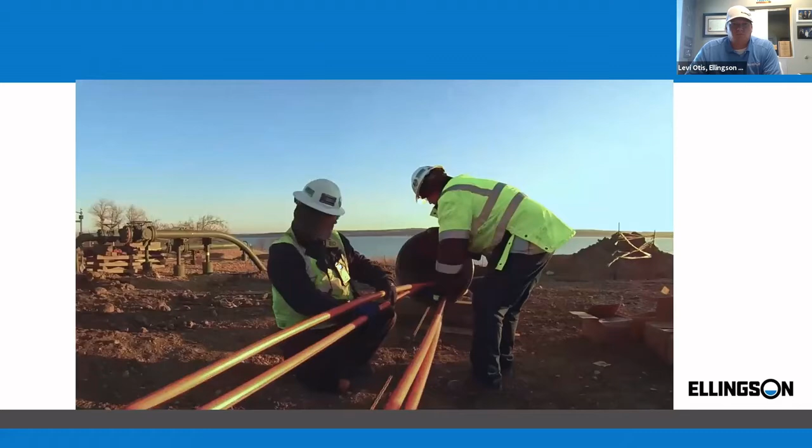Which is why we're evolving to address new challenges and make the most of new opportunities, to unify our organization as one team with one set of company goals, one vision of success, one story that simplifies our communications, with one set of expectations for one brand with more power to help our customers succeed.

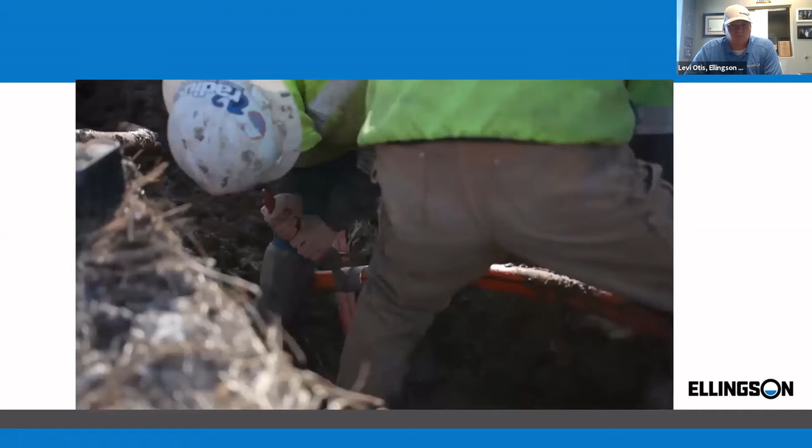How we show up, in the way we work and do business. Number one: the customers we serve, one who wants value and expertise, and the 5 values that make us one.

People driven to help everyone succeed. People who listen, understand, and then build solutions that exceed customer requirements. People who want to be the best, who measure performance and strive for constant improvement. People who innovate and constantly search for a better way in everything they do, who embrace the challenges that come with change. People who stay curious and hold themselves accountable and know how to celebrate our mutual success.

It's an evolution driven by what we'd like to be, and by what we'd like to do, and do it across industries and projects, all operating together as one.

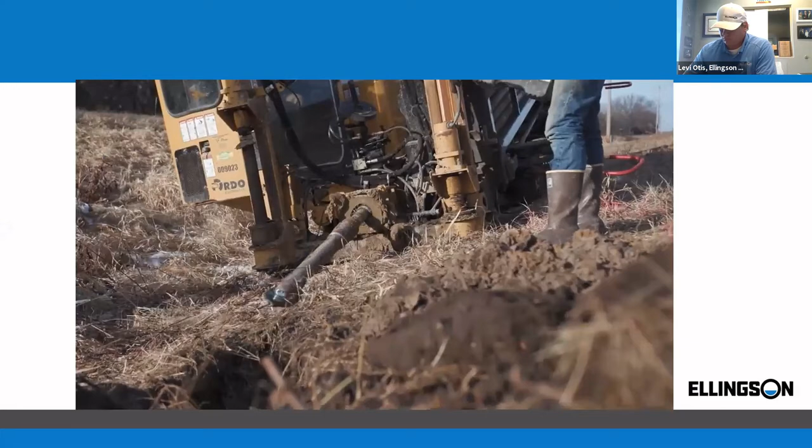From agriculture and infrastructure management to engineering and underground utilities, all business is more aligned and prepared for growth than ever before. We're ready with full service, turnkey, global solutions built on decades of practical experience and innovation, always putting customer needs first, with efficiency and productivity improvements to ensure success now and long term.

As one, Ellingson is better aligned to serve our customers. With unmatched customer service, we can solve the problems of today and address the challenges of tomorrow. We bring diverse skills and experiences organized around one business, one set of values, one shared commitment to success. One Ellingson. And when we are one, we all succeed.

All right, appreciate that. Sitting through that, our company takes a lot of pride in what we do, and all of the people that work with us, we consider each other coworkers, and the Ellingson family definitely treats us all like that.

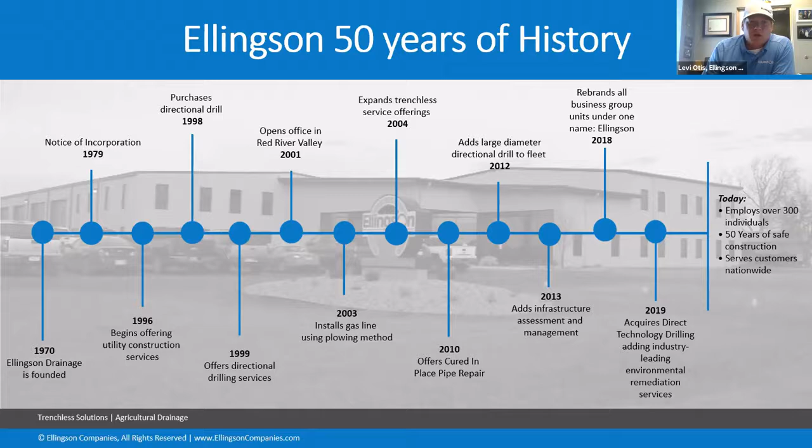Really, our guys get to see the world. As you saw in the video, we do oil and gas, water and wastewater, power and telecom, agriculture, and commercial industrial work.

These pictures are more of the surface examples that we do - pipe fusing, cured in place pipe which we talked about, and ramming. If you guys have been around, you probably know what all this stuff is.

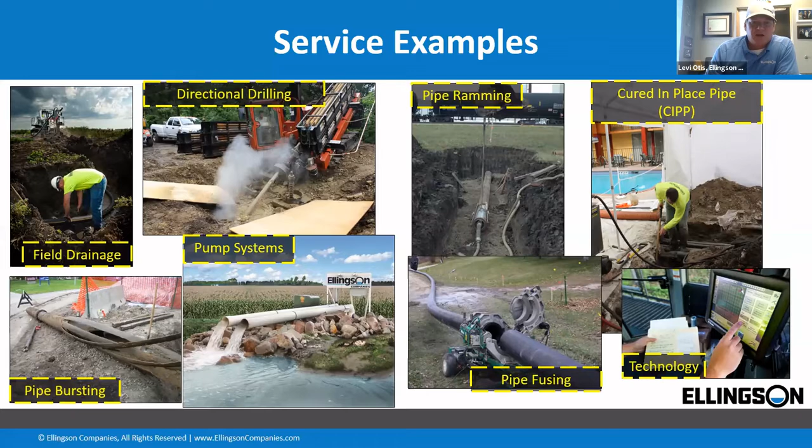Some of our customers - we work for some of the biggest companies in the world. Obviously Anheuser-Busch or Miller Coors, you know them, Crystal. We do a lot of oil and gas business.

Cavendish, Amazon - that's a DTD customer. We did drain tile and some different things for Wonderful, who you've probably seen their pistachios in every gas station from here to California. There's some more - we do a lot of federal work with our DTD company. It's pretty cool when you start looking at our customer list of who hires us.

Notable partners include the grower associations - as Lance said, we work very extensively on behalf of farmers in the Northern Plains on NRCS issues, U.S. Fish and Wildlife, and I'm sure most of you water board guys are farmers yourselves, so you deal with that. I have the benefit of working again for the Ellingson family on behalf of farmers, making it easier for you guys to do what you want on your farms and making sure the government isn't overstepping their bounds.

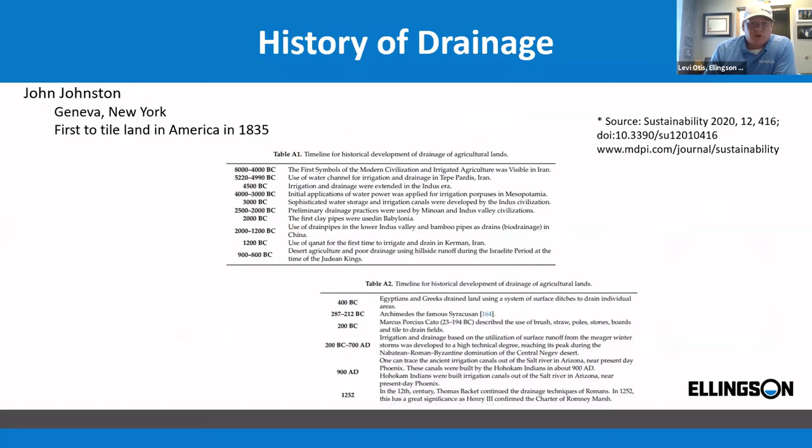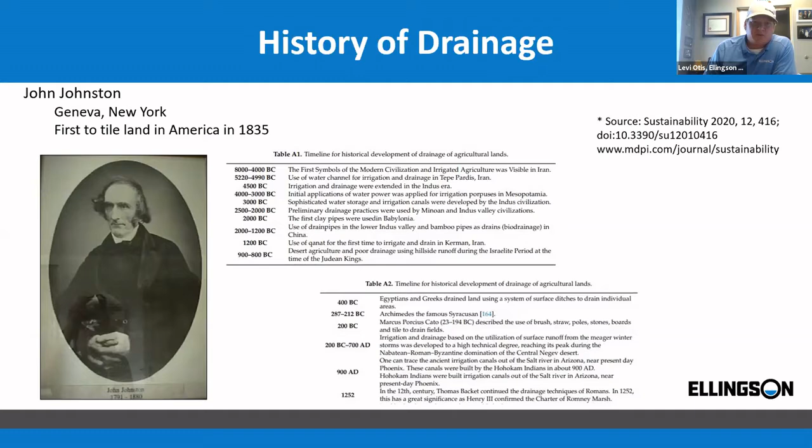So, history of drainage. I put John Johnston up there, from 1835 - he came to the United States and brought the first tile. The only reason I put him up there is my mom's maiden name is Johnston, so I like to feel it's in my lineage. I also thought it was funny that the first tile in irrigation ever discovered dates to around 8,000 to 4,000 BC in Iran, of all places. And of course the Romans, it's heavily documented that they tiled in 200 BC. It's just kind of fun to read that history if you're a history buff.

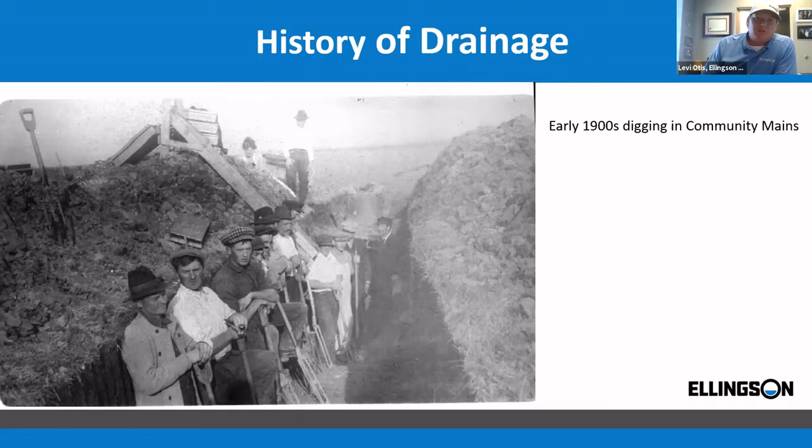When we talk to a lot of the old guys in the I-states, the neighbors all got together, and that's why I'm sharing these pictures. Here's Boone County, Iowa. These aren't hired men, these are the guys farming it, and they all united and said, wow, we have water issues, let's get together. As crazy as the world is, I think some of this stuff we could get back to, working with our neighbors instead of fighting all the time.

Hex pipe is not very common. Sometimes you'll see it dug up, but it's used primarily in Western New York and Northeast Ohio. I give Roger a hard time, Roger Ellingson, the owner of our company, that this is a picture of him digging back in the 60s. Of course it's not.

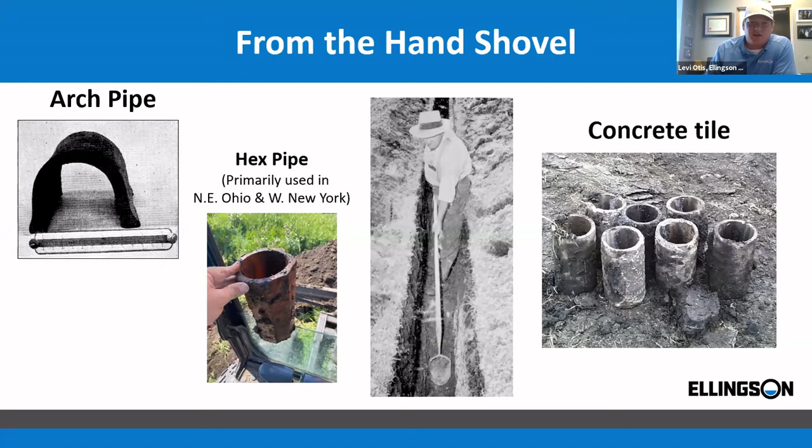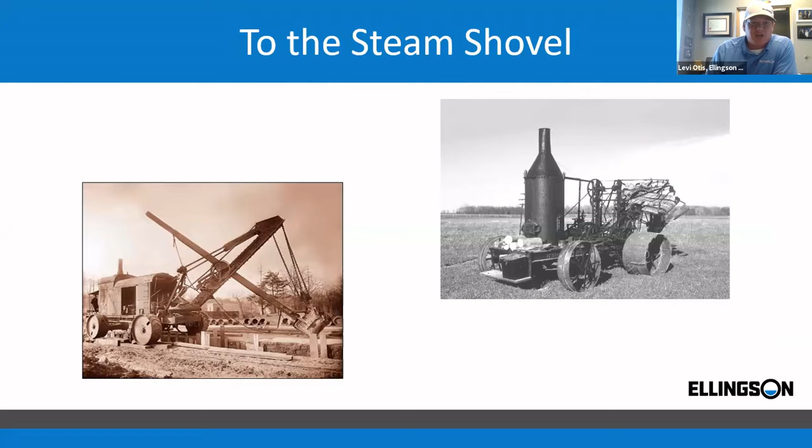And then concrete tile, which we actually do dig up here in North Dakota once in a while. Up by Tappen, North Dakota, we've found quite a bit of concrete tile. I don't know if farmers 75 years ago were bringing it in dark and not telling their neighbors about it or what, but steam shovels - if you ever go out to Rollag, I think they've got a couple, which is kind of neat, but the advent of the steam shovel started to speed things up.

1970, the first plastic tile kind of popped in, and I asked Roger one day what it was like to get to plastic tile after laying clay. He says, I was lifting clay tile into a trench, and a salesman came out, flopped out the plastic pipe, and kicked it in with his foot. From there they strung it in 250-foot coils, and he thought he died and went to heaven when he was a younger man, putting it in by hand.

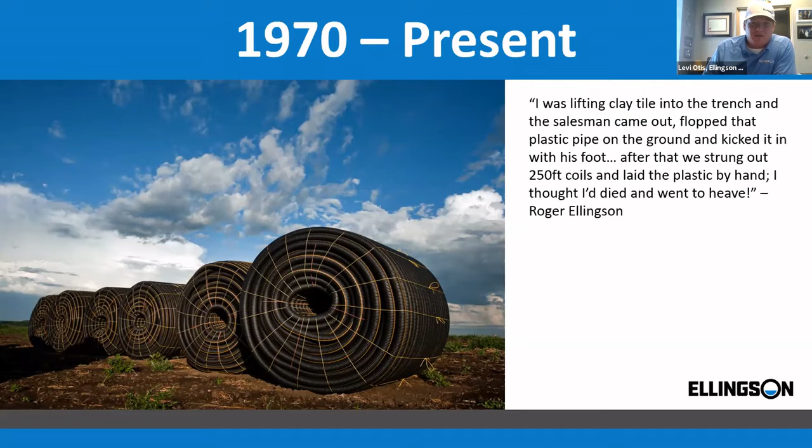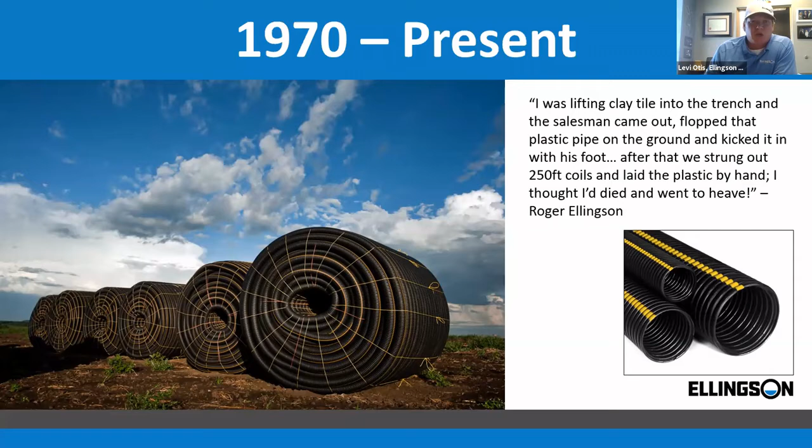That was pretty cool. So obviously, you know what Prinsco pipe is. We do 99% of our business with Prinsco. They're another family-owned company that's just a wonderful company to work with. So if you haven't, I'd encourage you to call them, for those of you who do tile on your own. It's a great company.

Speicher wheel machine back in the 70s, down in the bottom left corner, and then this Badger plow we owned in the 80s to the mid-90s, and was sold and went down to Windom, Minnesota, and now it's still in operation in Indiana today, so that's pretty cool. And then the Bron 550 tile plow, that's what everybody has seen up here. It's a very powerful machine, looks like an army tank, and they do a really nice job as well.

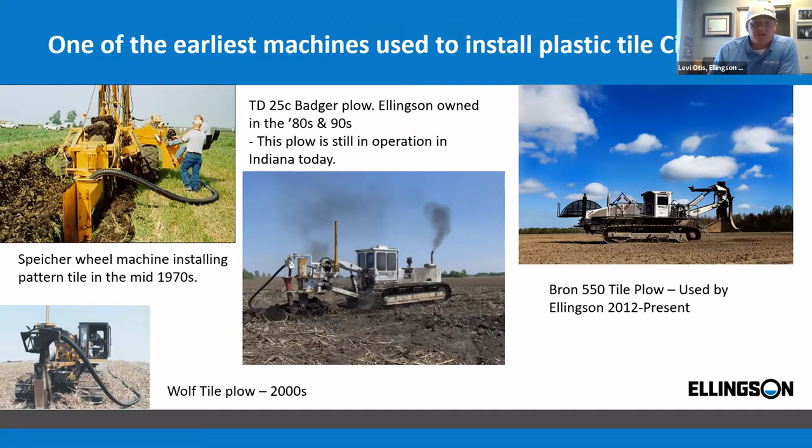Spot or random tiling. The I-states had the benefit of having what is now the NRCS, but SCS for many years, paying farmers to go and drain those low areas or wet ground. I'm not going to call them wetlands because I never did a determination on them in the 40s or 50s, but you get my point. So that's what a spot tiling plan looks like.

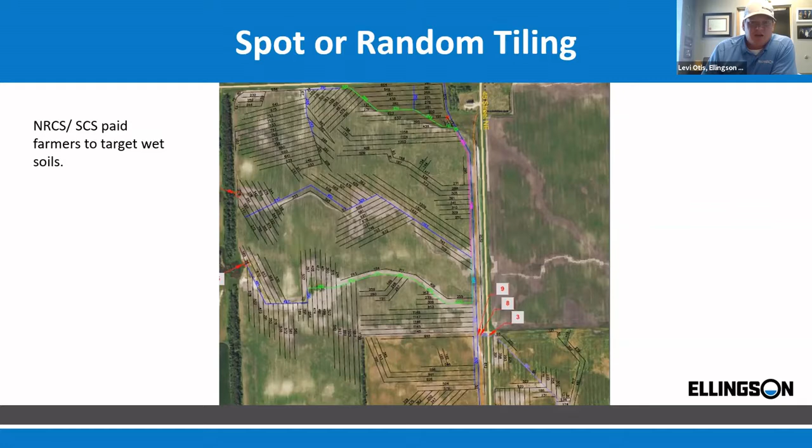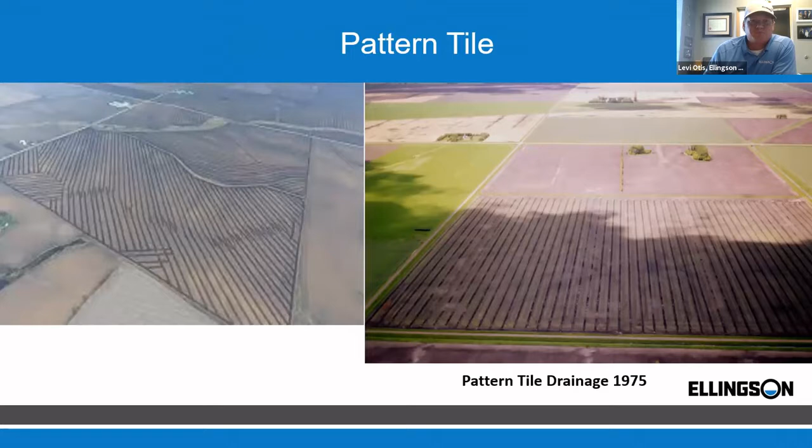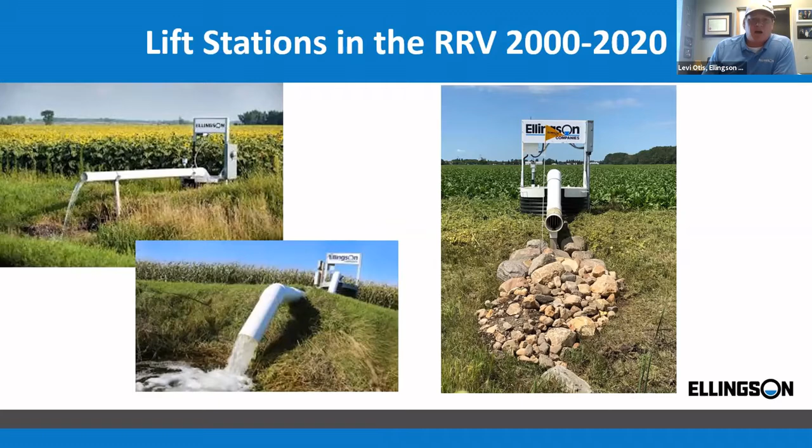Lift stations. First lift stations were probably built by Ellingson. I know there were a couple others, but really started mass production as tiling ramped up through 2000, and I think Lance mentioned 2011, 2012. That's really when things started kicking off, and I'm sure you see those all over the place.

So Drainage 101, I want to play this video for you. It's about 5-6 minutes long. If you've seen it, use the bathroom. But it's an incredibly good video, and I can't do as good a job explaining Tile 101 as this video does. Prinsco put this together, and they're coming out with another version soon, so that should be pretty cool.

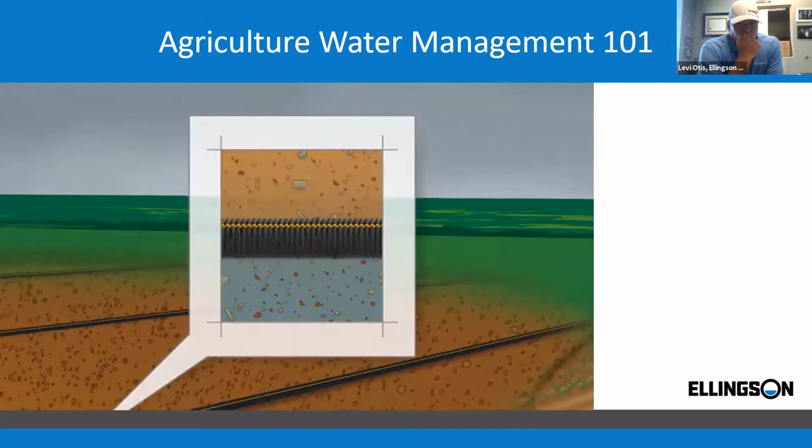From a side view, we see the main. Note, the water table is just below the main. A properly designed water management system does not take all of the water out of the soil. It manages the water table to keep it at a constant depth, which is usually 3 to 5 feet below the soil surface. By managing the water table, the optimal soil profile for plant growth is achieved.

The soil profile is the area from the soil surface to 2.5 to 4 feet below. This area is where nutrients are taken up by the plant roots. Ideal soil properties in the profile are 50% minerals and organic matter, 25% air, and 25% water.

A cross-section of the main reveals the laterals entering, allowing the water to flow downhill into the main. As rain begins above ground, the soil profile is able to accept water from the surface as it filters down. Once the water reaches the perforated laterals, excess water enters the system and begins flowing to the main.

Compare that with the same field without the water management system. Typically, the water table is higher, with less area available to absorb water. When the soil reaches full saturation and rain continues, excess water cannot soak into the ground.

The only place for excess water to go is to flow over land to the lowest point, carrying with it valuable soil and nutrients. This will cause erosion of surface soil, dumping sediment and nutrients into the ditch or stream. A water management system allows more water to be filtered through the soil and less risk of soil erosion.

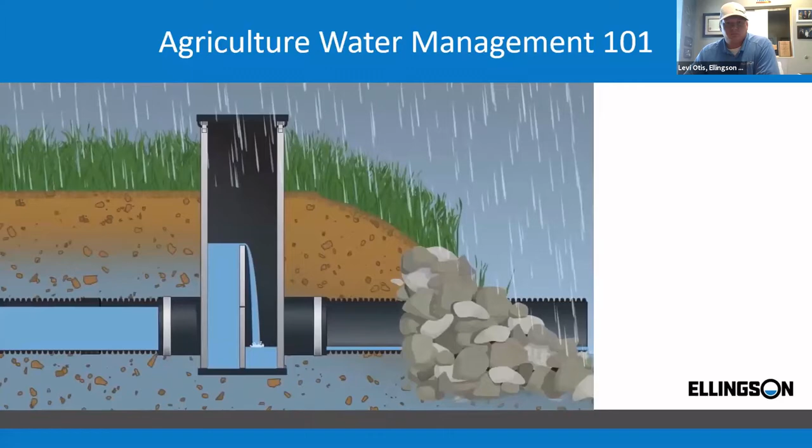When the system is saturated and the pipes are full, excess water flows over the stop logs and through the outlet. Stop logs can be adjusted to hold water in the system, particularly after planting in the spring and prior to extended dry periods throughout the growing season. If excess water conditions are present, stop logs can be removed, allowing water to flow out of the soil profile, especially prior to spring planting and fall harvest.

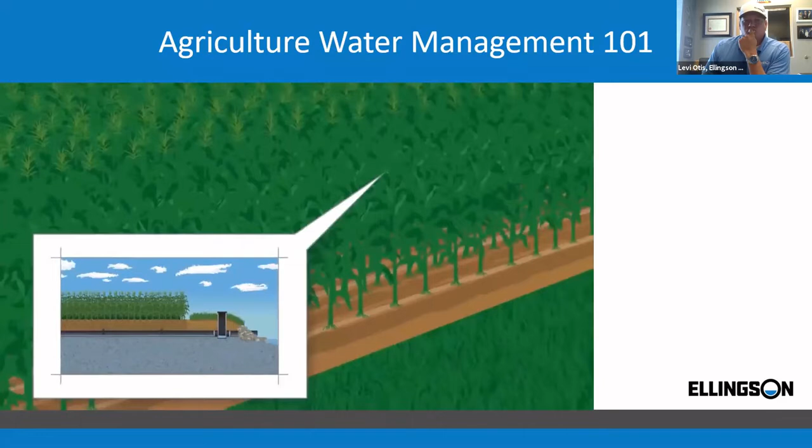Managing the soil profile with a water management system has tremendous benefits. It is an affordable tool producers can use to directly impact the health of their crops during the growing season. Keep in mind the golden rule of drainage: drain only that which is necessary to ensure trafficability and crop production, and not a drop more.

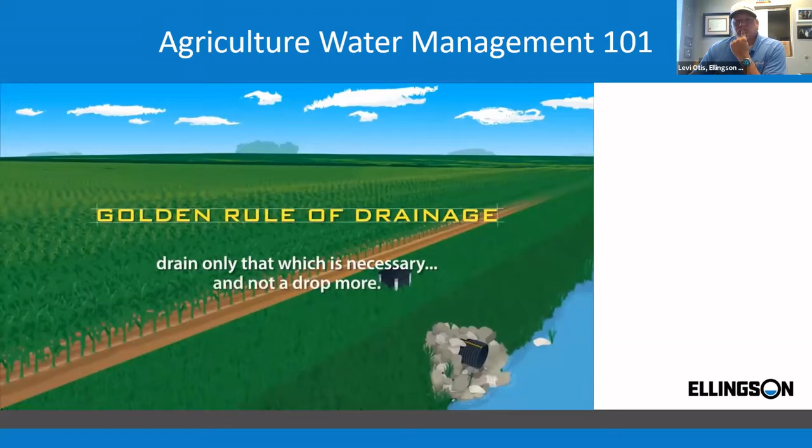So as you saw in that video, which I'll compliment Prinsco for putting together, you can't say it any more simply than that. But controlled drainage is something I believe in and this company believes in, being able to manage that water, and as they said, don't drain a drop more.

And yes, we do put in gravity outlet systems, and that's based on the landowner's decision. But most of our stuff, especially in the valley where it's flat, we recommend control structures, just because the ditches are wet all the time. Ditches actually act as a tile line, right? Some of these deep ditches we dig are wet because the water table is that high. So in different parts of the country, when we do these big ditch projects, we'll come in and lay tile on the outside and inside to try to shore up the water from entering them so they dry out, and then you don't have some of the cattail issues as frequently.

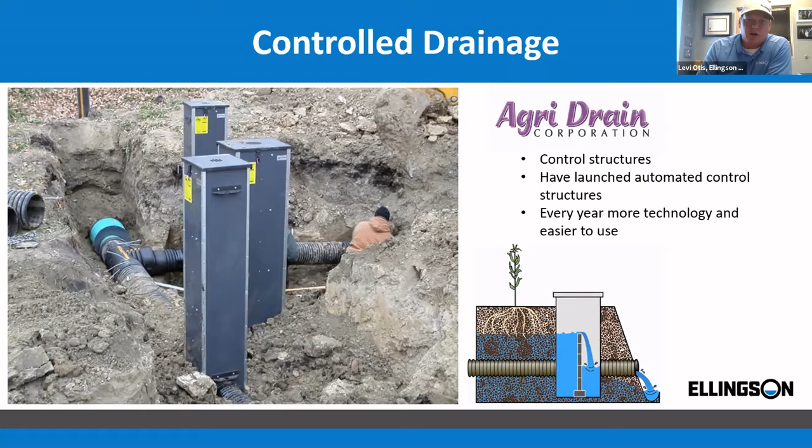But if you ask the question, well, what was the planting date? Oh, we planted them on the same day. Why'd you plant them on the same day if it's tile versus no tile? Well, that's the only day the farmer could come and put it in. And that's not very fair to the tiled farm versus the non-tiled farm — if you're going to plant them on the same day, do it when the tile's ready, not just any day. That's my one gripe about a lot of these studies, and if people don't ask that question, we don't know. So I'm just putting it out there.

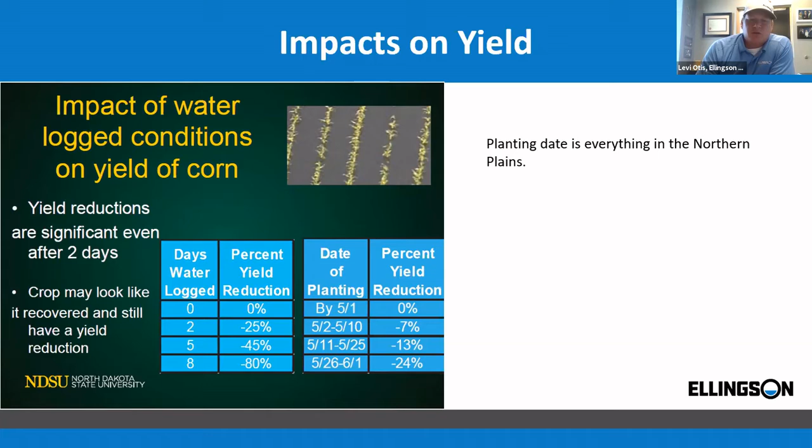But 25% of your yield could be gone with 2 days of waterlogged roots. And on the right side of the picture, if you're planting between the 2nd and the 10th of May, you're already losing 7% of your crop. And if you're planting in June, there goes another 25%. So just kind of an interesting impact there.

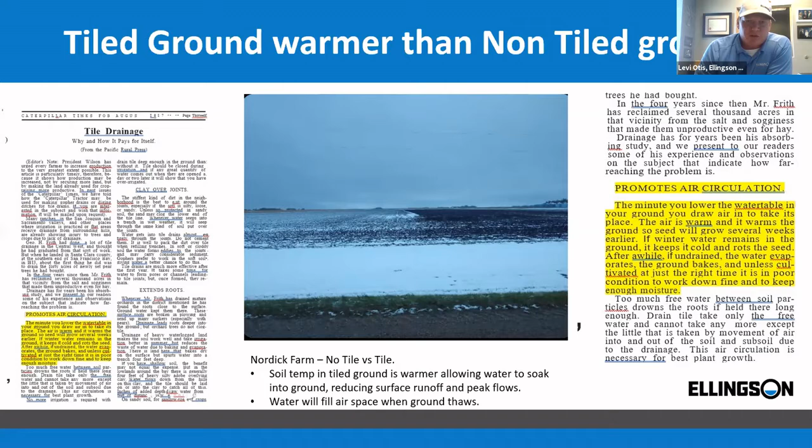This talks about air circulation, as you saw in the video. The minute you lower the water table in the ground, you draw in air to take its place, and the air is warm, right? So I think you guys get it. It's pretty interesting — we get pictures and Snapchats and texts and tweets very frequently from people showing their systems working at maximum performance.

I can't believe how many times people say, well, you're creating more water. Well, if we were creating water, I probably wouldn't be on this. I'd be living in the Bahamas, you know what I'm saying.

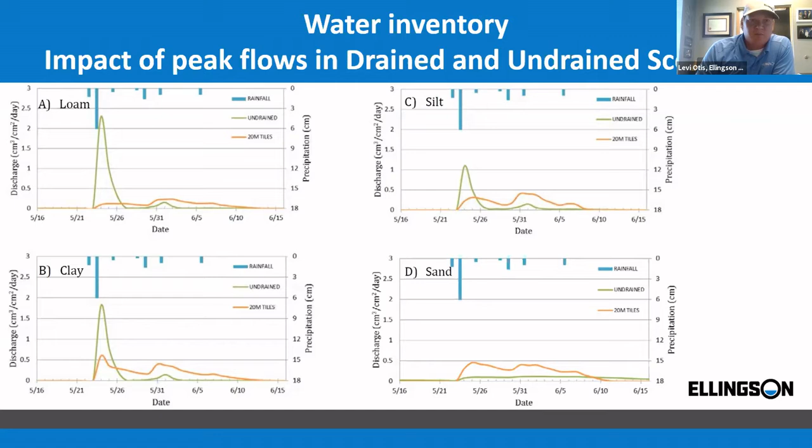Saturated soils - when soils are saturated, the only place for the water to go is off, and I think we see that more and more. Yesterday, Keith said in the last 3 years, summer floods have been more impactful, and I think he's right. From what I see where I live in Argusville, 15 miles north of Fargo, we're getting those more frequent heavy rains with dry spells in between. The month of June, I don't know if we had a drop of water, we were below average. And then in one and a half nights, we had a couple inches of rain that took us over average. All June it didn't rain, and in one night it got wet. So it's really interesting what people are seeing and saying, and it's falling in line with what we're talking about.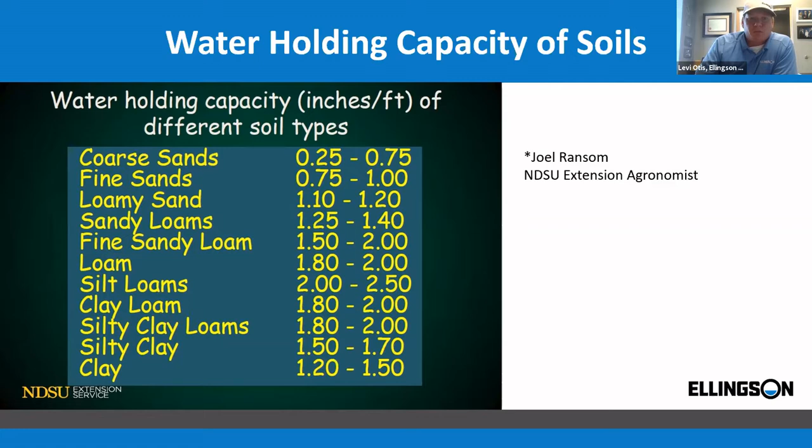Things that I would like you guys to think about, or maybe even people in Fargo when they drive by a lift station in March - no, we're not planting in March. And if you see a tile pump running, the odds that it's draining anything out of the soil profile is very low.

Typically what happens is a farmer forgets to turn off a tile pump, and somebody drives by, snaps a picture, sends it to Valley News Live saying farmers are flooding Fargo and it's a drain tiles problem. Well, the amount of tiled fields versus untiled fields in North Dakota is somewhere between 4 and 5% of the valley tiled, and less than 1% of drainable acres in North Dakota are tiled.

So should I take it personally? Probably not, but I do not like when city commissioners call into KFGO and say, oh geez, all these farmers are flooding Fargo, we got to make a law to turn off tile pumps. Well, all it's doing is really regurgitating surface water that's running into the tank.

Should the pumps be shut off? Absolutely. They leave them on to drain as far into winter as they can, but once the ground's frozen, you guys know it—you're not draining out the soil profile. So it's more of an emotional thing than a scientific or mathematical one.

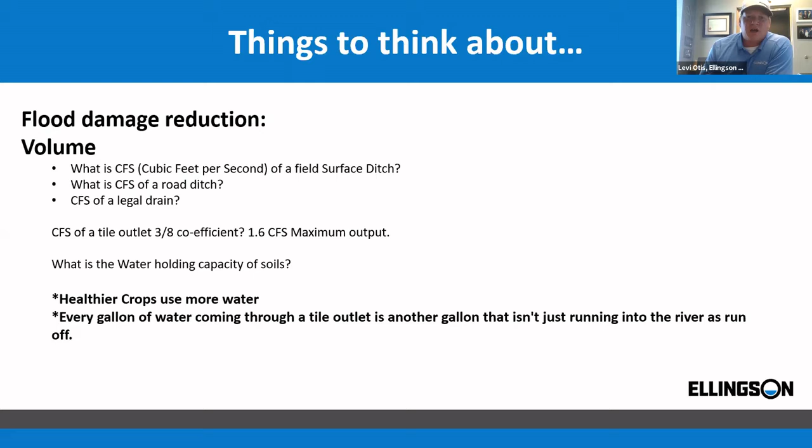Let's see, water holding capacity—we've talked about that. And the earth, your ground does act as a filter, right? So you have far less phosphorus coming out of a tile pipe than you do overland, and sediment isn't leaving the field as it would with a surface ditch. And yes, there is a nitrate issue, but we'll get into that and have that conversation.

So this farm is right south of my house, south of Argusville. And if you've heard of the Cass County Pilot Project or Red River Basin Commission pilot project, this farm has several surface ditches on it. It doesn't concern me living on the east side of it because I've seen it over 10 years, but it does fill up road ditches and backs into his field. You can see the 15th and the 16th—I took pictures as I'm out running my dog, and here's the bottom end of that farm that actually runs south to this legal drain.

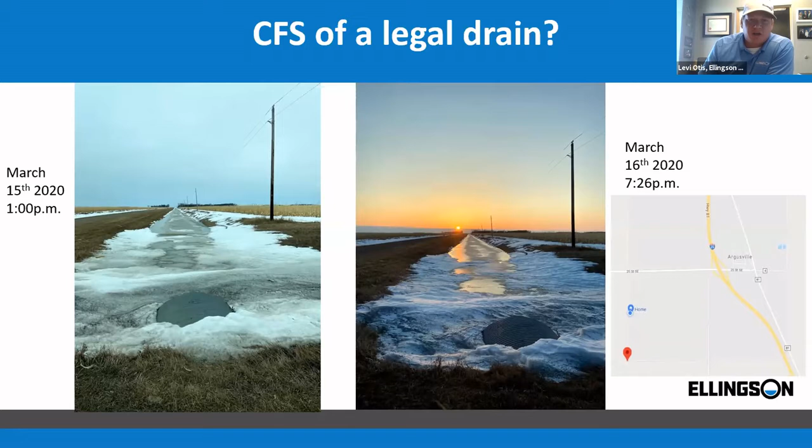And here's a couple days apart, just showing—I know you guys see this stuff all the time, but I think it does give a good explanation of how those things happen.

Now, it may have sounded like I'm ripping on surface drainage. I am not. If you don't have drain tile, you have to get into your farm. That's what farmers do. They grow food, and they need to be able to get into it.

But once subsurface water management or drainage is installed, land leveling begins, and farmers realize that, and we try to get them to move up and shore up some of those surface ditches. You don't need them all once you're tiled. The reduction of surface ditches reduces erosion, keeps soil and sediment in your field, and allows more opportunity for reduced till, strip till, and cover crops.

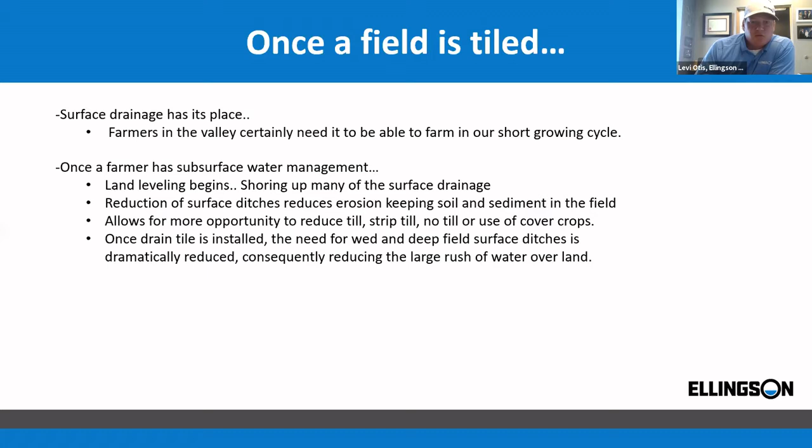We will go next to the Ellingson approach. I've got another video here, which we did a couple years ago. So bear with me.

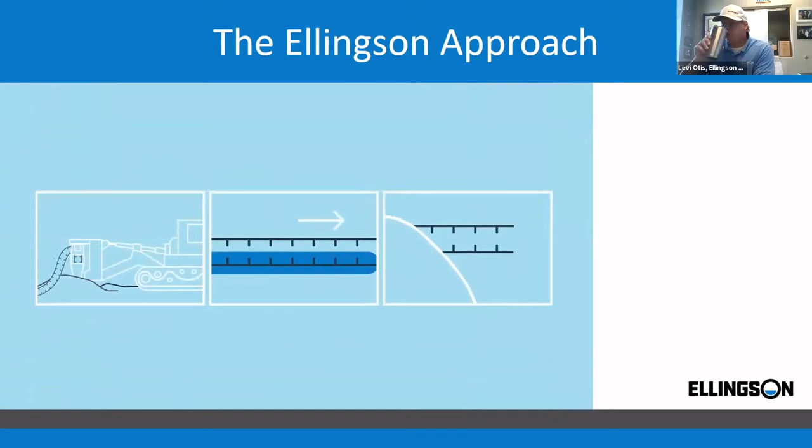Since the early 1900s, farmers and landowners have been tiling agricultural land. Next to soil pH level, proper drainage may be the second most important factor in determining crop quality and yield. Surprisingly, installing drain tile hasn't changed much in the last 50 years and has often been treated as little more than a service transaction between farmers and tiling contractors. With tile placement decisions based on the wettest areas of a field, there wasn't much conversation taking place about return on investment or quantifying which fields might benefit the most from drain tile.

Now, there is a better way. At Ellingson, our approach to water management and design combines an age-old practice with modern agronomic science, engineering, and water management technology to help our customers make smarter, more calculated drainage decisions. Our services and tools will help you analyze field-specific information and ultimately make more informed water management decisions. We do this by using our trademark approach, H2Money, where soil type, weather history, crop productivity, drainage classification, and crop type are assessed to quantify risk and determine the rate of return on your drainage investment.

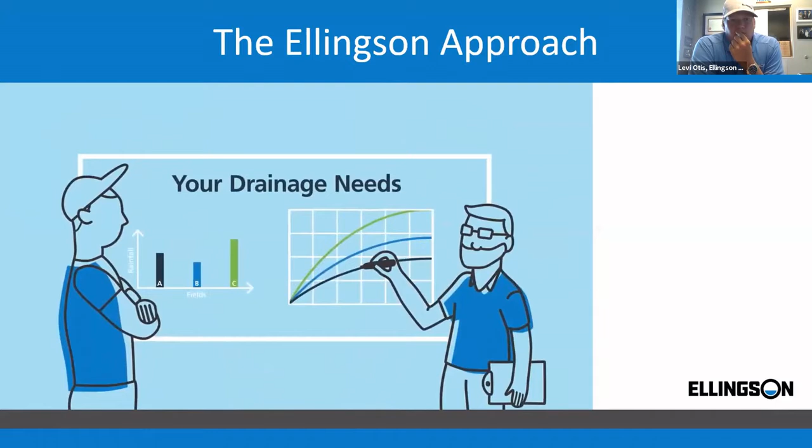Believe it or not, it may not always be the field with obvious wet areas that should be tiled first. The water management specialists and engineers at Ellingson will combine science with years of practical drainage experience to help you compare and prioritize your drainage needs across all of your fields, and then provide you with a detailed drainage assessment and design plan that quantifies ROI and can be taken straight to your lender.

With Ellingson, our primary goal is to ensure customers always have the most effective drainage plan for their specific farm and soil types, backed by the latest technology and water management practices, regardless of who installs the tile. We'll provide you with installation-ready designs, maps, and cut sheets when you're ready to do the work.

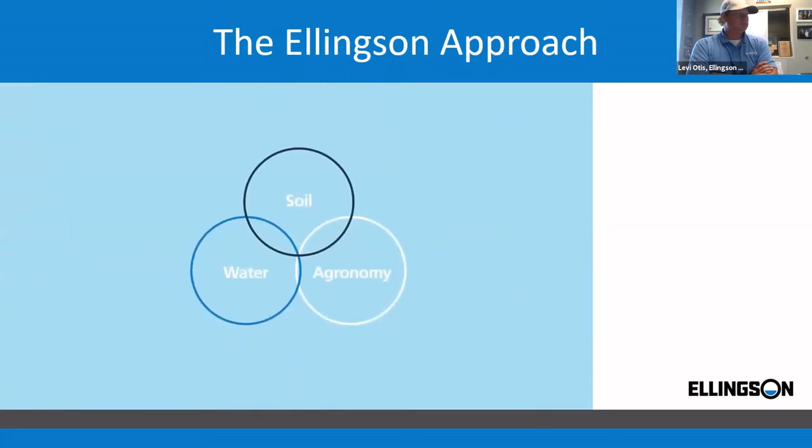Life on Earth depends on water. It is our most valuable natural resource. Plants need this vital liquid to flourish and reach their peak potential. But even the most essential element must be well managed. At Ellingson, we bring the sciences of water management and agronomy together, combined with knowledge from nearly a half-century of drainage experience, to help farmers make better and more profitable water-related decisions. Ellingson, a smarter way to manage the water on your land.

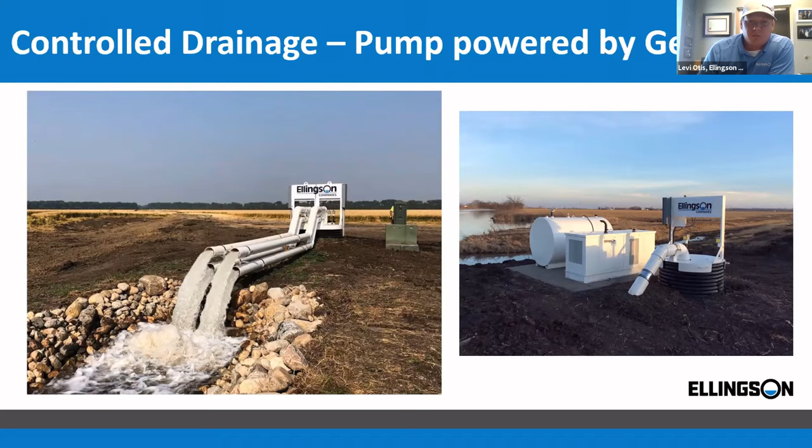Drainage coefficient. This is a huge deal. What I want people to understand is that you should not do a blanket regulation on drainage coefficient. I know there's been watersheds in the past, specifically Minnesota, that for a few years had a drainage coefficient recommendation or rule that nothing over a quarter unless on a special permit.

Sugar beets, dry edible beans, and potatoes need at least a 3/8, but should probably be at a half-inch coefficient depending on the soil type, because they don't like to be wet. You can probably get away with a 1/4-inch coefficient depending on topography and soil types on corn and soybean rotation, but I wouldn't personally. I'd always go to a 3/8, or at least have a conversation with your agronomist and the tile contractor, and see what the best bang for the buck is.

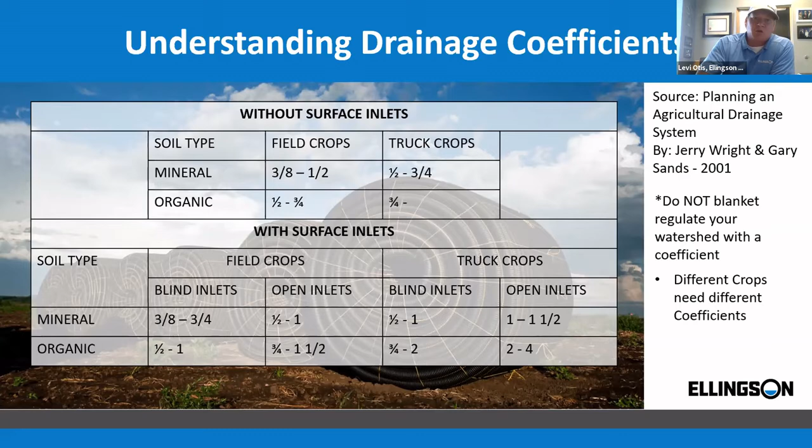But you got to make sure you're getting what you're paying for. And if you're growing specialty crops, the water board has to understand that when you're putting in your tile application, and why you want a larger drainage coefficient. This is another video that we did that's good at explaining drainage coefficients.

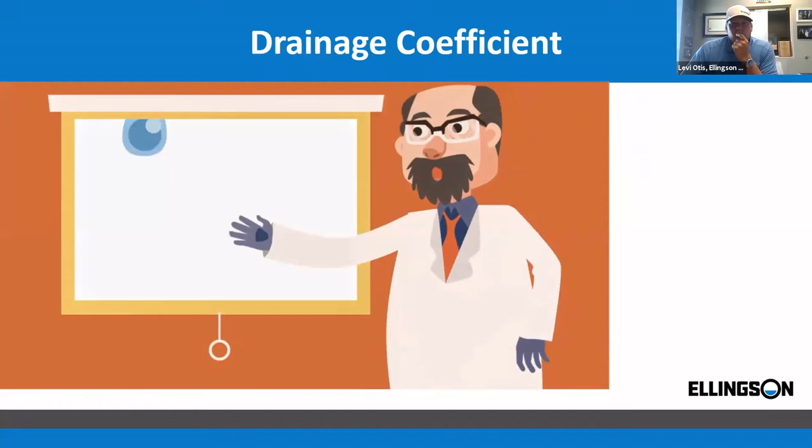Installing a subsurface drainage system is the best way to protect your crops from being damaged by heavy rainfall and excessive soil moisture. But first, you need to know how your drainage coefficient impacts the performance of your drainage system. A properly designed drainage system could make or break your crop investment. The amount of time it takes to drain excess water off your field is directly related to your drainage coefficient. It's simple: it's the amount of excess water your drainage system can remove in a 24-hour period.

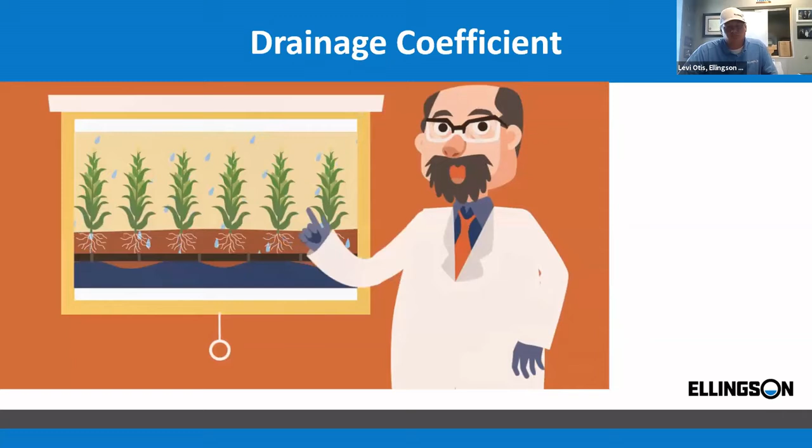Drainage coefficient. Your drainage system should be capable of removing excess water from the upper portion of your crop's active root zone within 48 hours of a heavy rainfall. For most upper Midwest farmland, this means draining 3/8 of an inch of excess water per day. In other words, the recommended drainage coefficient for most upper Midwest farmland is 3/8 of an inch. Know your drainage coefficient and harvest bigger yields.

It's February in Farmville. Yep, I got my drainage system installed after harvest last November. Ellingson Drainage designed and installed it at a 3/8 inch drainage coefficient. I'm gonna sell a lot more corn, and I didn't have to buy any more land. Gonna buy a new truck at harvest time this year. Yeah, I got a drainage system installed too. It's a 1/4-inch DC, way cheaper.

Yeah, we'll see. It's April in Farmville. The winter snow has melted. The field on the left has a drainage system with a drainage coefficient of 3/8 of an inch. The field on the right has a drainage system, but it's only built to a 1/4-inch DC. The field on the right drains better than it did before, but it's still not ready for planting. Maybe in a week or so. Or to put it another way, there'll be a few less bushels per acre at harvest.

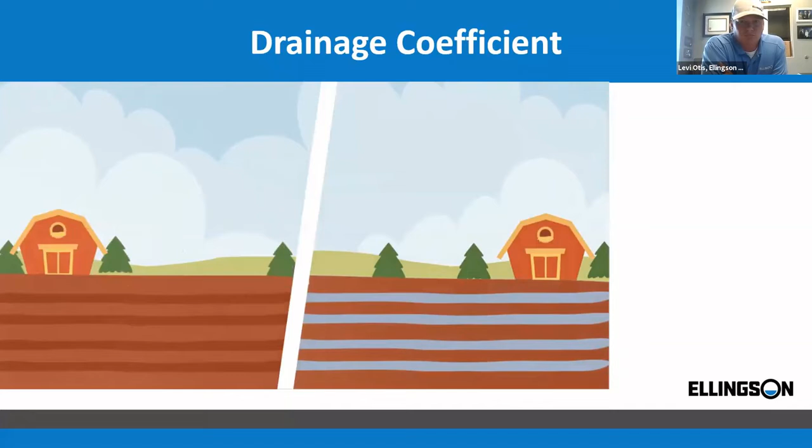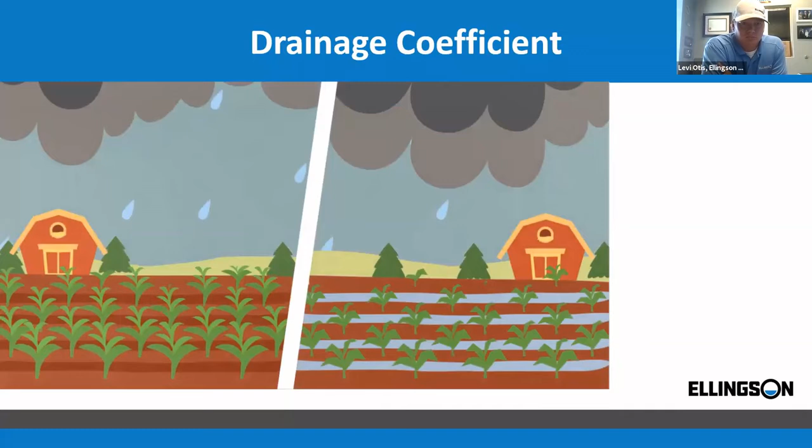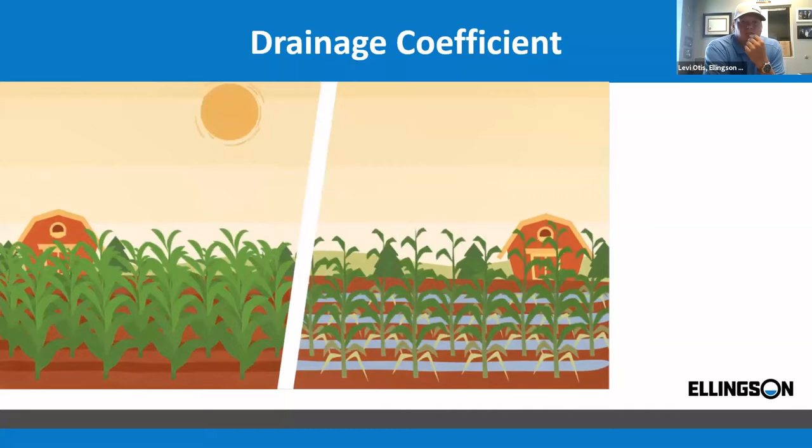It's June in Farmville. They're getting what they call a gully washer, 3.5 inches in one day. The crops on the left seem to be doing well. The ones in the field with the 1/4-inch drainage coefficient, not so much. It's August in Farmville, and it's a scorcher. Hasn't been a drop of rain for weeks, and it doesn't look to get any better soon. You'd think a drainage system wouldn't help now, but the crops on the left have strong roots that were encouraged to grow deep into the soil profile.

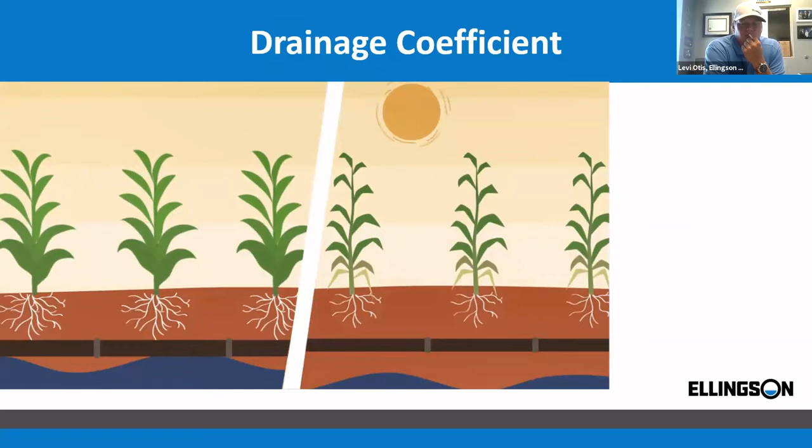The crops on the right are just getting baked in the soil that got compacted when June's heavy rains didn't drain fast enough. It's October in Farmville. The field on the left is ready for harvest, and it's gonna be a bumper crop. The field on the right, well, there's always next year.

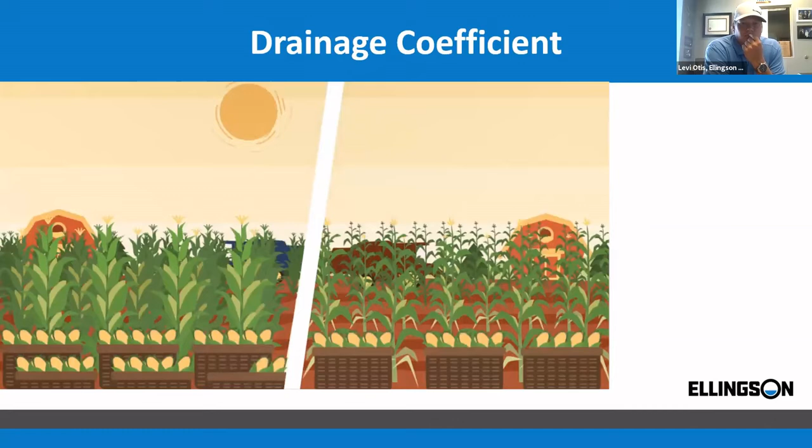It's December in Farmville. I don't get it. We both had drain tile installed on our farms. Why were you able to plant sooner and produce better yields than me? My farm was better than it has been in the past, but doesn't compare to yours. Yup, the 3/8 inch coefficient made all the difference. My field produced at its maximum capacity. Like I said, my field produced better than it has in the past, but saving a few bucks up front looks like it's going to cost me in the long run. I really missed an opportunity to have my field produce maximum yields. Should have called Ellingson Drainage.

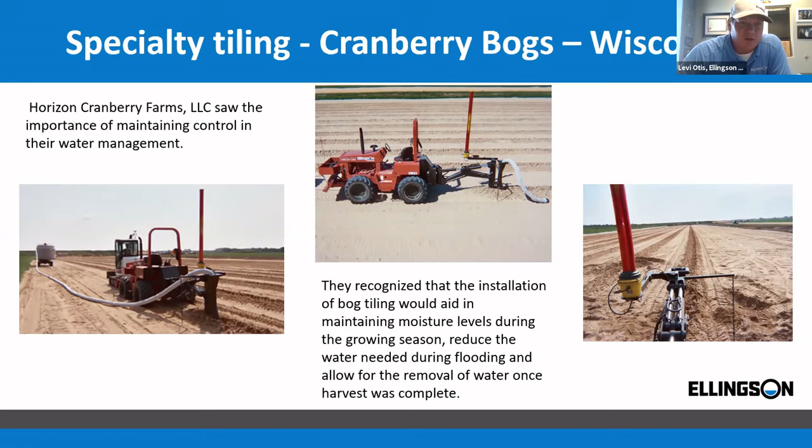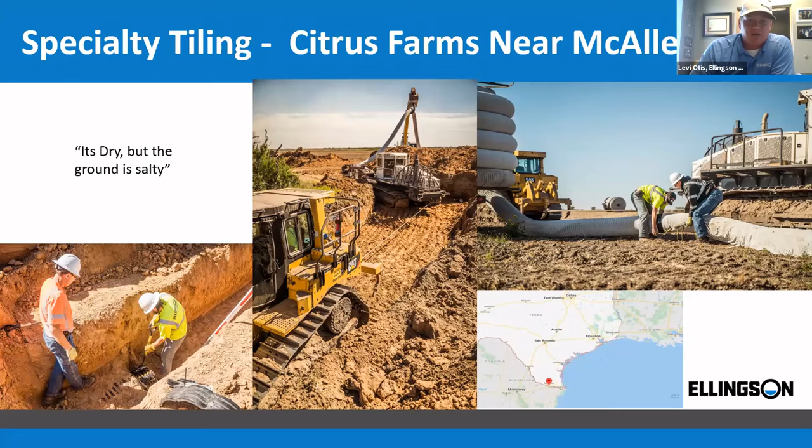In California, we do a lot of almond farms. That's kind of been a hotbed lately, so it's just pretty cool, the stuff we're able to do.

Climate change was brought up yesterday or the day before. Dr. Hunt talked about it, and without being political, or debating the reason, I think we have to agree that the climate changes. Lake Agassiz used to be 600 feet deep, now we're farming it. Life happens, and we need to be cognitive of that. How are we going to react, as you, as decision makers and water boards, and us as contractors, and our agronomists and our academics at Iowa State or NDSU or UND? How are we going to continue to feed the world so our kids and grandkids are left with the best possible chance to keep feeding the world? Are we prepared right now? Are we going to soon be prepared? Again, Keith's quote: in the last 3 years, summer floods have been more impactful.

That goes back to the coefficient video, right? If you're getting 3 inches of rain, can your system take it and remove that water quickly, and not right off the top?

Subsurface irrigation is a very fun topic for me to talk about because it's kind of mind-blowing, putting water back into the ground. We've done a few of those projects in North Dakota, one up by Wolford, and a couple others, but really cool stuff. We've also done a really large project out in North Carolina.

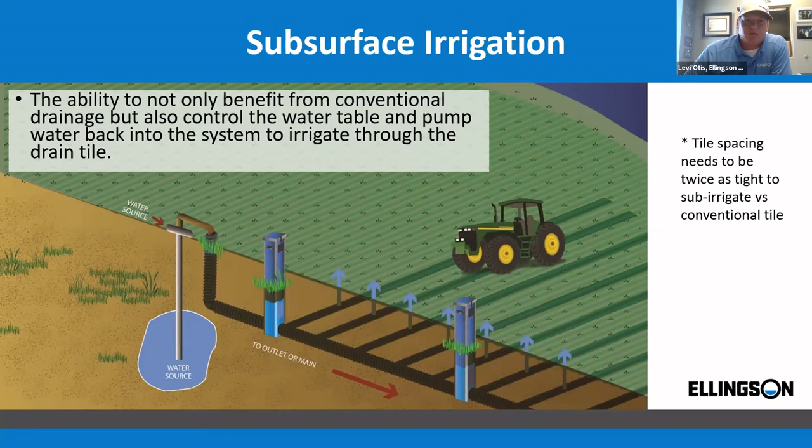Another thing to understand is that to have subsurface irrigation, you have to have a higher perched water table or clay base. This is really starting to take off for a number of customers, and it's really expensive—probably double what it costs to tile something.

The North Carolina subsurface irrigation project was for a local potato farmer who's got farms out in North Carolina and Gum Neck, right on the coast of the Atlantic Ocean. They do two crops of potatoes every year, and during some of those seasons it gets dry. It's a fully automated drainage system.

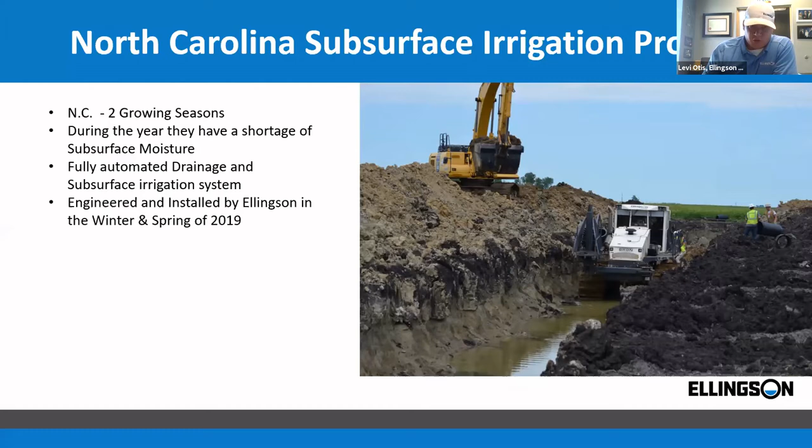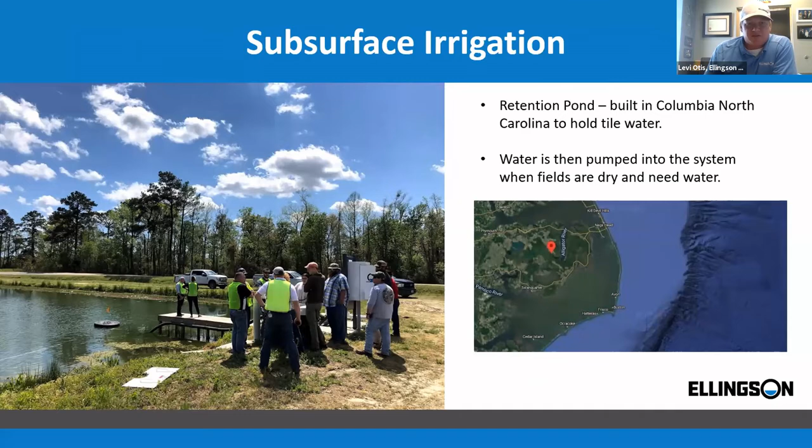It was built so all the drainage water flows into it and keeps it full. There's an overflow if you get a bunch of rain, where it goes down a series of ditches and then out to the ocean. So it's a pretty cool system.

They're learning as much as we are with this project, because as the videos have said, and you guys understand, it's not like flipping on a switch and all of a sudden you drain that soil profile. It takes days to get that down.

So it takes—you have to be part-time farmer, part-time meteorologist, and just try to outthink the storm, which is easier said than done.

Water quality is, in my opinion, the number one thing facing agriculture today. I travel the country, and it's the number one conversation, whether we're in Ohio talking about Lake Erie or the other Great Lakes, Iowa, Missouri, down on the coast talking about hypoxia, or talking about Lake Winnipeg.

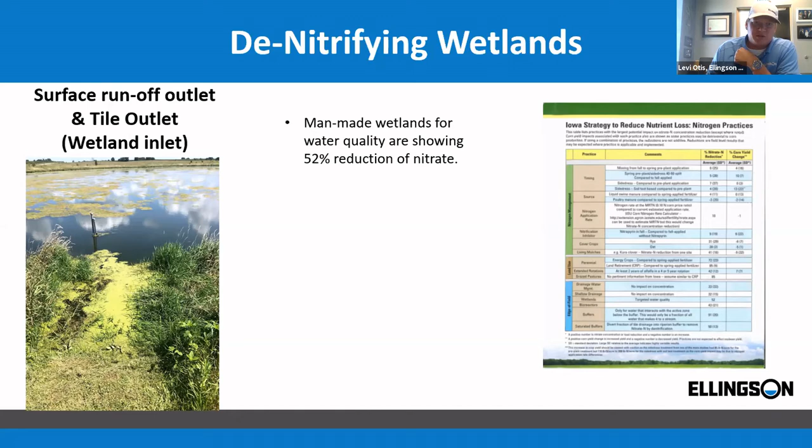When we toured this, there was a beaver out there, many birds, and birds of prey in the trees, as you'll see in the next video. The trees weren't planted, they were just natural. I understand that NRCS or environmentalists don't like trees around wetlands because there are birds of prey and different predators that will eat the ducks and geese, minus the guys with shotguns.

I'll take this next few second video that just pans the wetland, but these wetlands only need to be at 0.5 to 1.5% of the watershed.

When I asked Dr. Crumpton and Dr. Helmers from Iowa State about phosphorus, they said we can engineer a wetland to do anything. And they said, well, why aren't these taking off more?

I think reading in between the lines of what they were saying is a lot of people don't want to enhance drainage, and something like this will enhance drainage. But we'll work through some of those issues and see if these ever come to fruition.

So here's the west side of the wetland, as you see the trees in the back, and there's the farm. That guy, he owns this wetland.

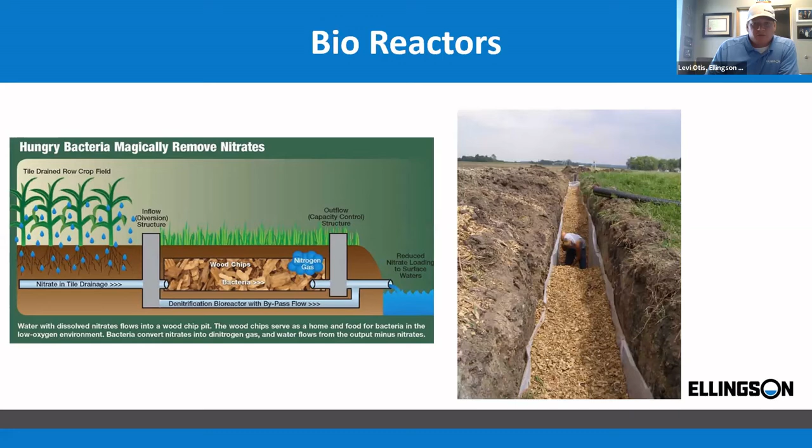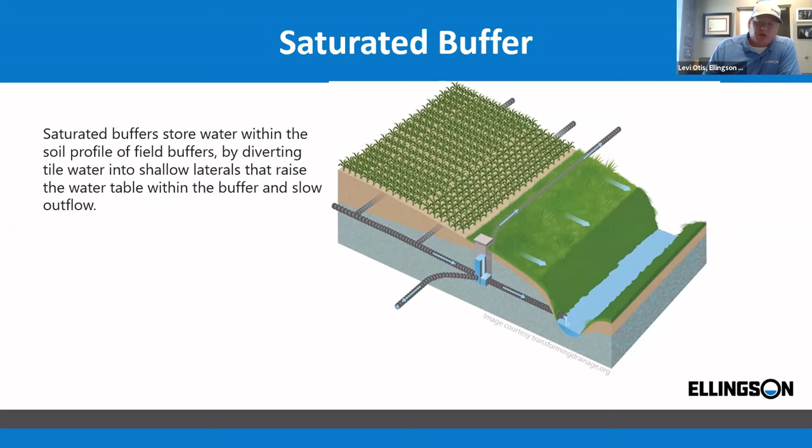Again, it's added cost, so getting these to be built more, you need some sort of cost sharing, because the benefit's there, but it's an added cost to the producer. And then flow reduction.

Reducing flow is a huge point. Back to that Prinsco Drainage 101 video: drain all that you need to, but not a drop more. If you can manage your water table and understand your lift station, the more you do it, the better you get. Leaving water in the soil profile allows your roots to use that nitrate before it flows downstream.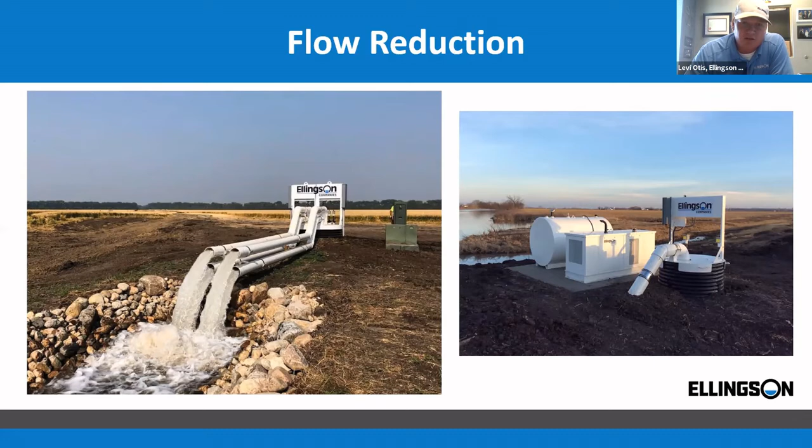Lift stations need to be used as tools, just as you use a sprayer or a combine. You can do some really cool things for your farm, taking a little more time and really understanding the flow and the math behind what you need to do in root depth and where you're at. Some exciting news I'll share at the end has a lot to do with this.

We have a proprietary index that our company developed with a group of ag and biosystem engineers, most of them out of NDSU that have worked with us, a couple from U of M.

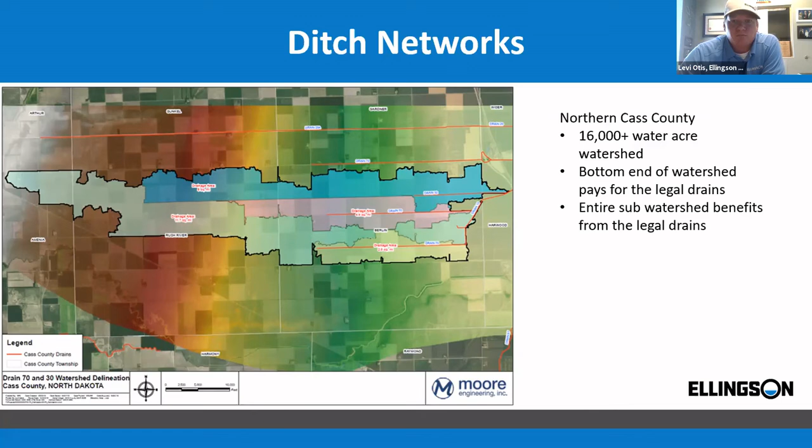Here's a group and county main. It's one of the most common things I hear from township boards or members and county board members - how do we have the conversation about group mains? And group mains are expensive, right?

If you bury 52-inch, 60-inch pipe, 48-inch pipe, and then have people start tiling into them, it's going to be expensive. But as one water board member said to me, well, it's not going to seem very expensive in 100 years. And I have to agree.

I know there's a lot of rural development grants, USDA things, where the mechanisms are there. If we all got together and lobbied our congressional delegation saying let's build some wetland banks, let's put some ditch networks in, let's move water, let's manage it - I think between you guys and corporate America and our landowners and our grower groups, I really think this is something that we could achieve if we all just sat down and talked about the way it should go.

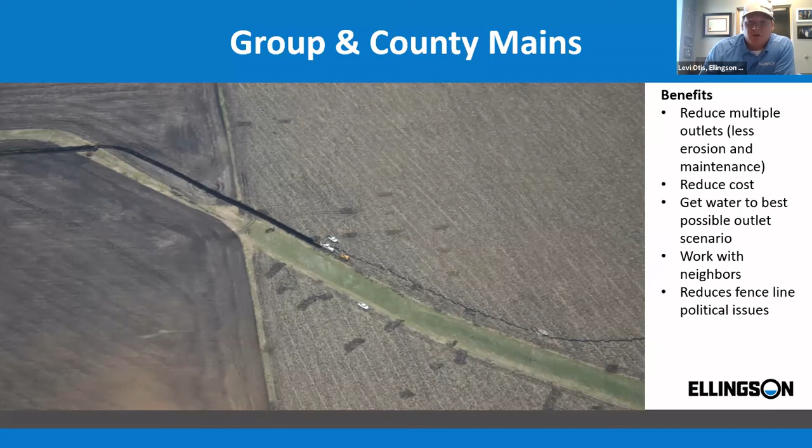And there's going to have to be some folks giving in a little, right? Maybe everybody has to give a little to make something like this happen. But I think it really would move us forward as an agriculture community.

Here's a legal drain that was built here last winter. I guess to add on to this, there's a lot of counties or watersheds where people feel the water has nowhere to go. I look at Devil's Lake growing up there - it's a basin, it's a closed basin. But then when you add lift stations to the east and west end, all of a sudden you're lifting the water up and out.

We've been doing that in Holland for thousands of years. They farm the seabed, and they lift the water up and out - that's what those huge windmills are for. If that's something we need to do, or talk about, or work together with the state on, I think there's ample opportunity to move water and manage it.

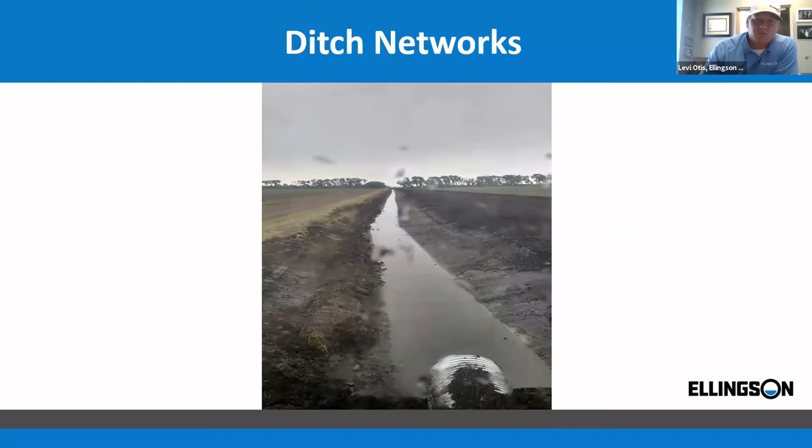ADMC priorities - I know I'm 15 minutes over so I'll go through these fast. Again, it's water quality, conservation, and farm production. So obviously for North Dakota corn, the number one reason, almost 62%, is excess moisture. Drought is another big reason, almost 20%, and then everything else.

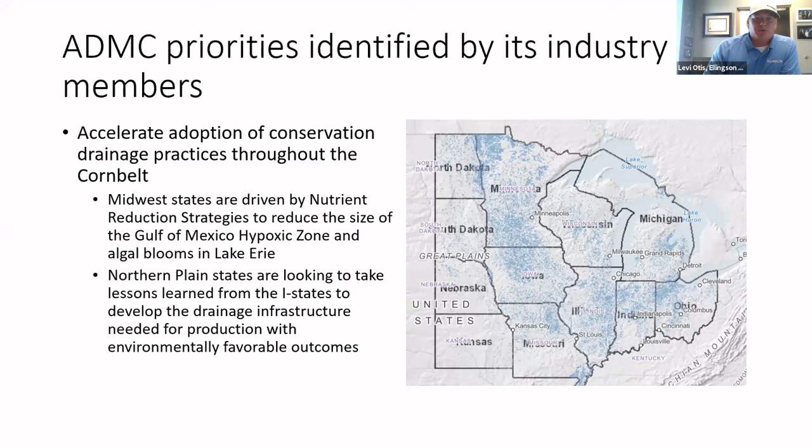Production, environment, and conservation drainage. I sit on this board with guys from all the way across the I-states in Minnesota, and it's just a fantastic organization. We don't see a lot up here just because Prinsco, Ellingson, and ADS, a pipe company, have got a plant in Buxton. I think we're the only three members who represent our portion of North Dakota and Minnesota.

Priority drainage practices include drainage water management, subsurface irrigation, bioreactors, saturated buffers, constructed wetlands, two-stage ditches, and oxbows.

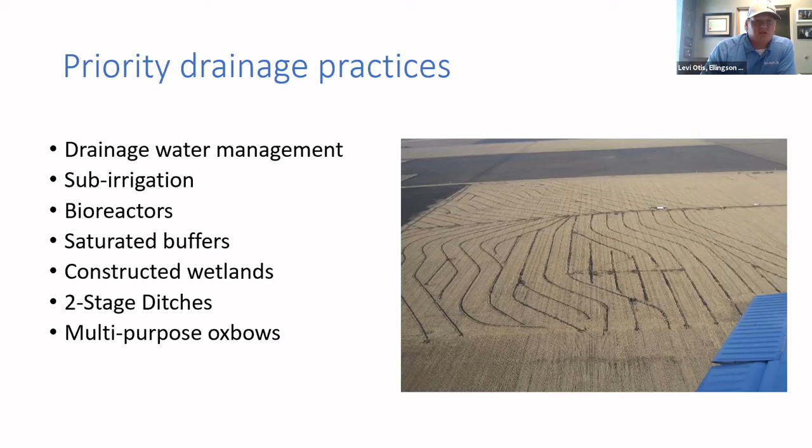As far as exciting announcements, we are launching a pump application. It's a soft launch right now. We've got a number of our largest customers who have lift stations with remote monitoring, so they can tell if their pump is running with their cell phone, and it has a list. Once we work out some quirks, hopefully this fall or winter, when you have your winter meetings, maybe we can show the water board that and some of the other technology we're developing, which will help you, your water boards, and our customers really understand what's going on and help us all be better at managing our water.